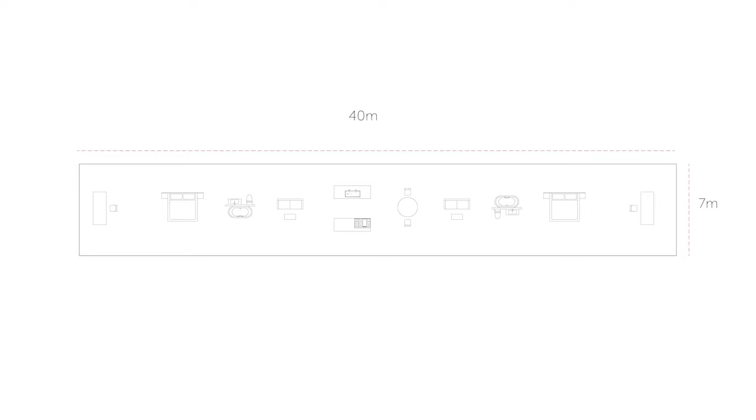Instead of combining them together, why don't we arrange them symmetrically on a straight line with private spaces on both ends of the line, kitchen and dining at the center. And for extra privacy, let's put the bedrooms and bathrooms on the second floor.

And then we finish up with walls designed to prevent you two from seeing each other too often. But the walls still leave enough space for you to occasionally catch a glimpse of each other's presence. You're still living in the same house, but 40 meters apart.

Ooh, this is looking interesting. The couple smiled. We'll definitely fight less and get along better in this house. But how are we going to find a place in Boston that fits this thing?

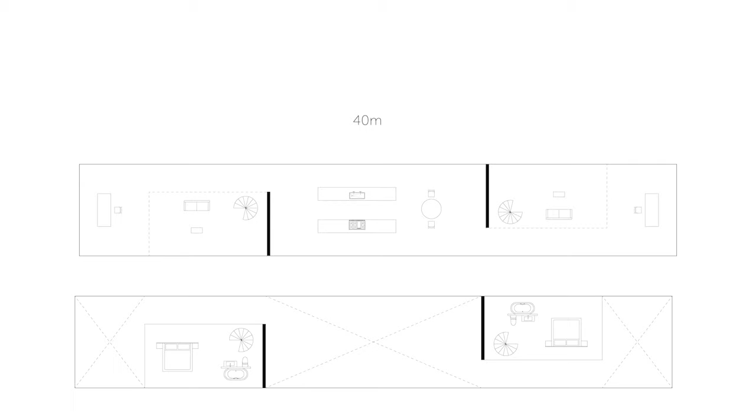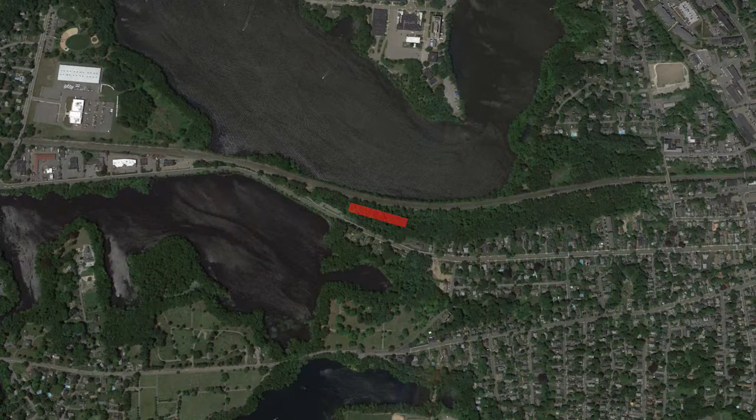Oh, don't worry, Mr. Flanders. I know exactly the place. It's right here on the map, 1 hour away from Boston. This plot is situated between a commuter rail track and a highway, sandwiched between two lakes to the north and to the south. Now place our diagrammatic plan on the site, and let's figure out the section first.

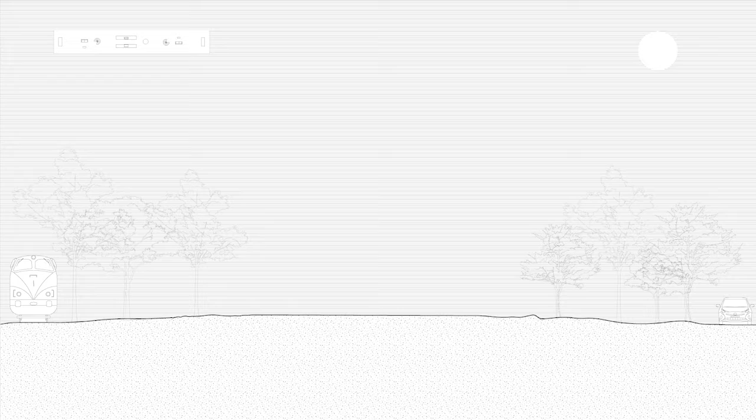With the noises from the highway and the railway, I propose to build your house with 2 layers of concrete: an inner layer of cast on site concrete, a middle layer of precast gutter and drainage which serves as a structural frame that holds the outer layer, the precast concrete panels.

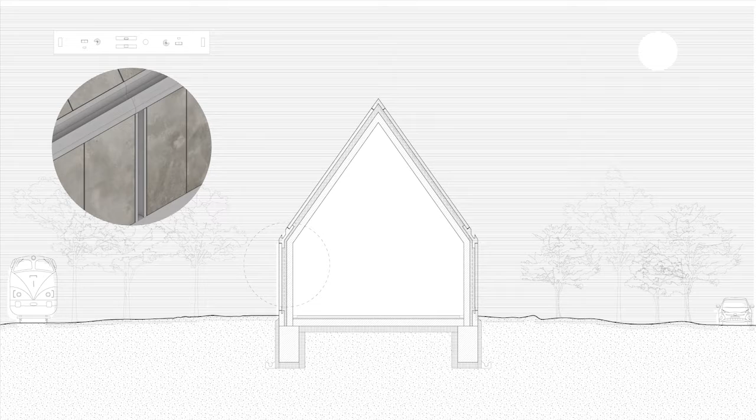The design is based on 4 variations of this pitch roof section, and each represents a different program. Variation 1, the kitchen. Solid walls shield the house from the railroad and the highway. Natural light is drawn in from above. The folding geometry creates a duality of space.

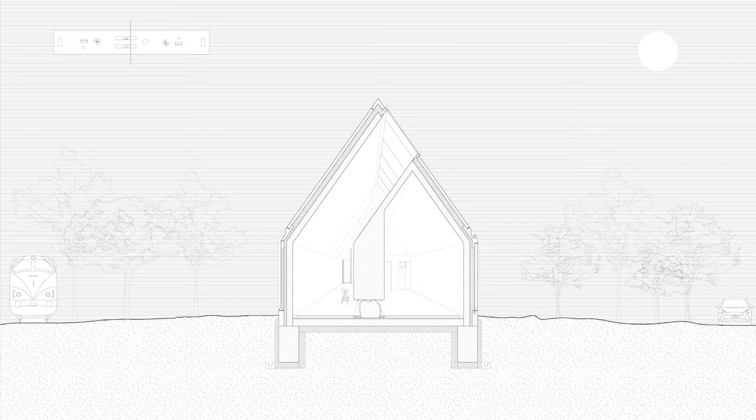One kitchen split into 2, one bright and open, the other dark and enclosed. Mr. and Mrs. Flanders, when you two don't feel like seeing each other, just stay on the other side of the kitchen. And when you're in a better mood, just join your partner on the other side.

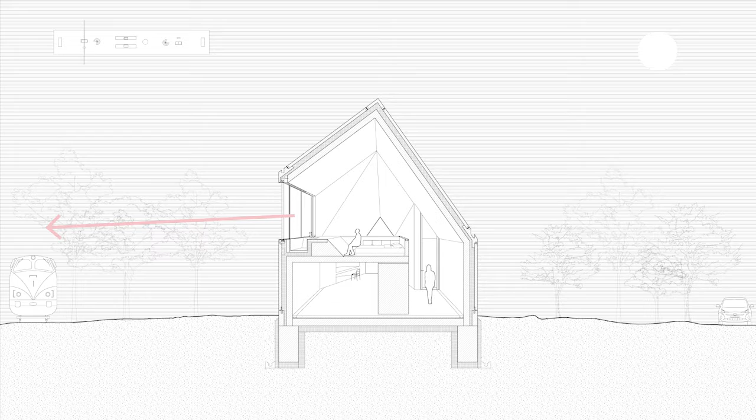Variation 2, bedroom and living room. The bedroom is on the second floor, allowing direct view of the lake while avoiding the rail tracks. Again, the domestic spaces are split into pairs, a private inner chamber on one side, and this continuous flow space on the other side. An uninterrupted flow between the private bedroom and the entrance corridor.

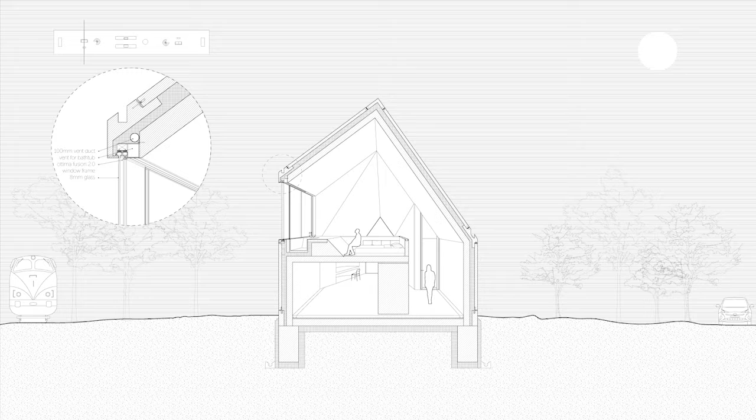When your loved one walks by the corridor, even if you don't feel like greeting her, you will hear her presence. The sunken floor design dramatizes this intricate play of privacy.

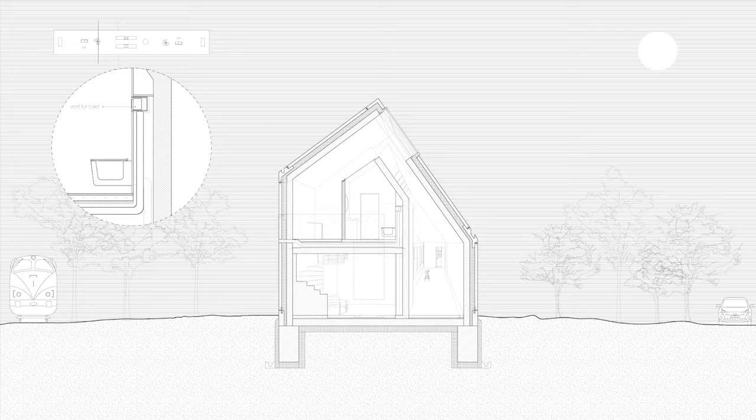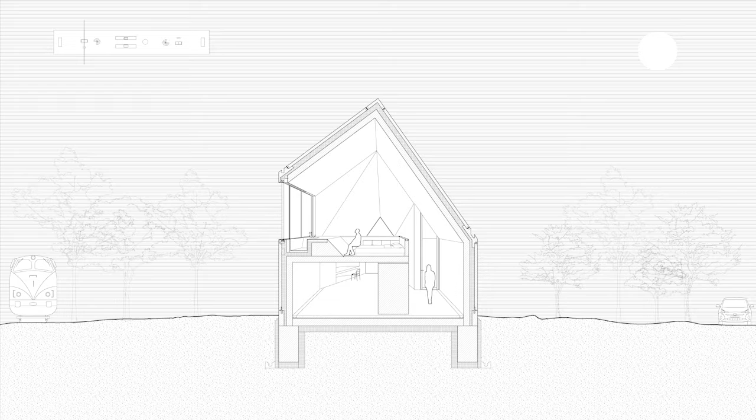And variation 4, the kids' room. Situated directly above the dining space, the kids' room follows the same folding logic. The kitchen's ventilation duct is routed through the second floor, and the bathtub is incorporated as a part of the second floor. Through those four variations, a duality of space is established, allowing for the coexistence of two independent souls.

And following the development in sections, our initial diagrammatic plan has evolved into this form. And now we'll take a closer look at the long sections.

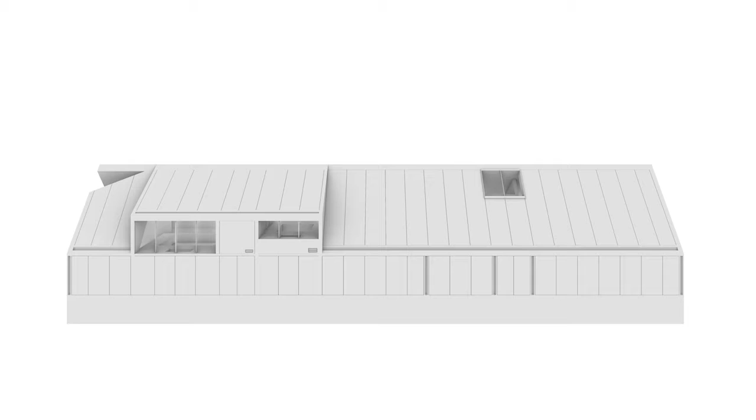The systems, some of it mentioned before, navigate between the inner layer and the outer layer of concrete in a way that avoids disrupting the flow of space, from the drainage system to the ventilation, and then the radiant heating and cooling system.

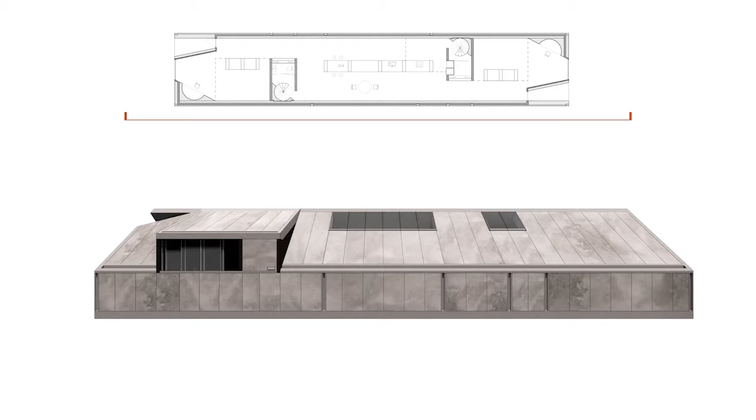Despite being 40 meters apart, you can still catch a glimpse of each other. And here we see private bedrooms maintaining a visual and vertical connection to the common area. It's almost as if your family is living on the same alley, not in the same house.

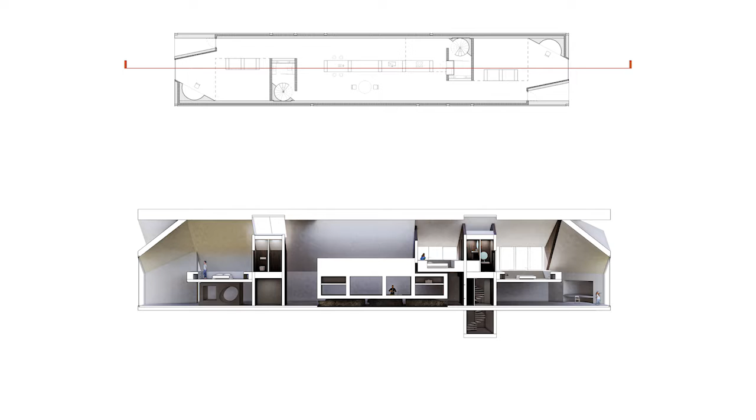Mr. and Mrs. Flanders, this house guarantees that you won't be around each other all the time, but you will feel each other's presence in more subtle and more profound ways. Well, I hope this design satisfied both of your wish to live in the vicinity of each other. And I think 40 meters seem to be just the right amount for your love to flourish.

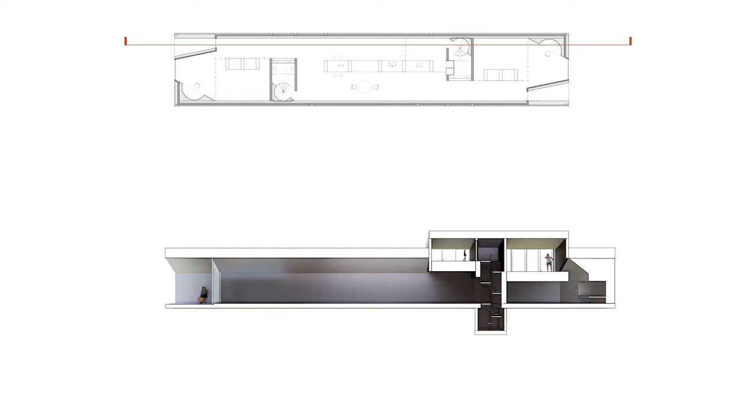That was the story of this house. It has been a few years since it was built. Apparently the Flanders really enjoyed it, and they recently sent me this professionally made film to show how much they are enjoying it. And let's take a look.